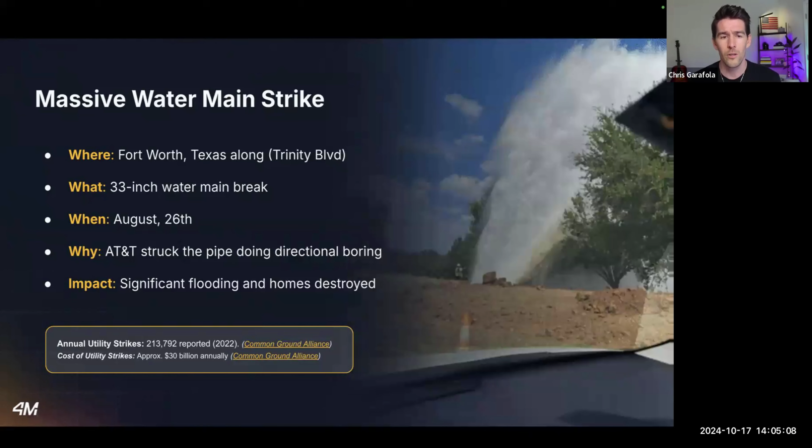Some of you guys might be aware of this one. This happened earlier this year, a massive water main strike in Fort Worth. A 33-inch water main was struck by an AT&T contractor during directional boring, and there was significant damage. I know we always talk about utility strikes on the impact that it has on projects, but as you can see here, there's greater impacts, intangible impacts and costs that these strikes have on our communities.

As you can see in the bottom here, over 200,000 utility strikes a year. This is from the Common Ground Alliance. This was in 2022. I can only imagine this number is expanding because there's more and more stuff going underground every single day. It's only getting more complex under there. And the cost of utility strikes, approximately $30 billion annually. Again, this is probably a soft number here because there's a lot of this impact that you can't even measure or quantify that's happening from utility strikes outside of the effects and impacts that it's having on projects.

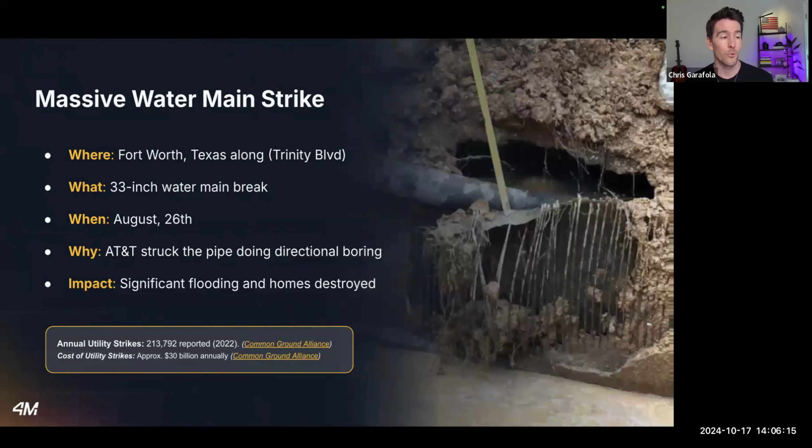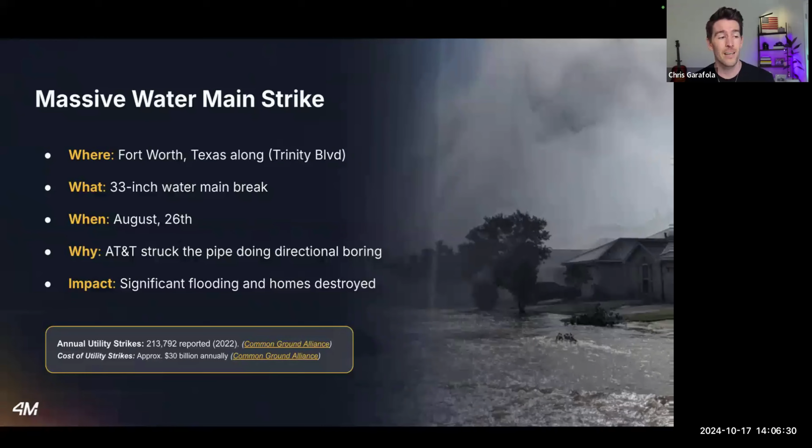In this example specifically, this could have all been avoided if AT&T had faster, earlier access to reliable utility data. They could have redesigned or relocated this utility prior. It also could have been avoided if they were to validate this before digging themselves as well. So it's just another stark reminder of what's at stake here without fast and easy access to reliable utility data.

Another example, this just happened this month. You might have heard of this one as well in Jamaica, Queens. A high pressure gas line was struck and an elementary school had to be evacuated. So again, this is just a common occurrence. These are just two examples. You guys are seeing this in the news every day. And if you're not seeing it in the news, you might be experiencing it yourself in the field. So it's obviously a really, really big problem.

And it begs the question, where does this problem come from? Is it just bad luck, or is there something systematic going on here that we need to dive into? I'd argue that it's not bad luck. So let's start by looking at what the data is telling us.

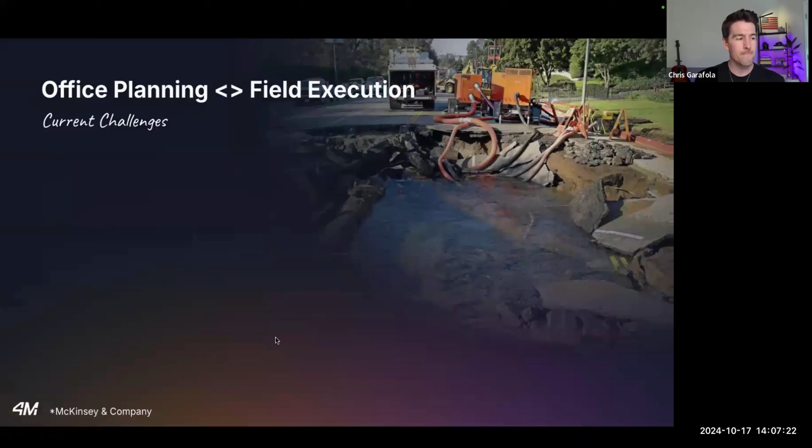So the data tells us there is a main challenge, and one of those challenges is there's a disconnect between office planning and field execution. In other words, there's a gap between the data that we collect, or honestly don't collect, our plans, and the reality that's on the ground. It can feel like we're operating in two different worlds here, and you can see the impact.

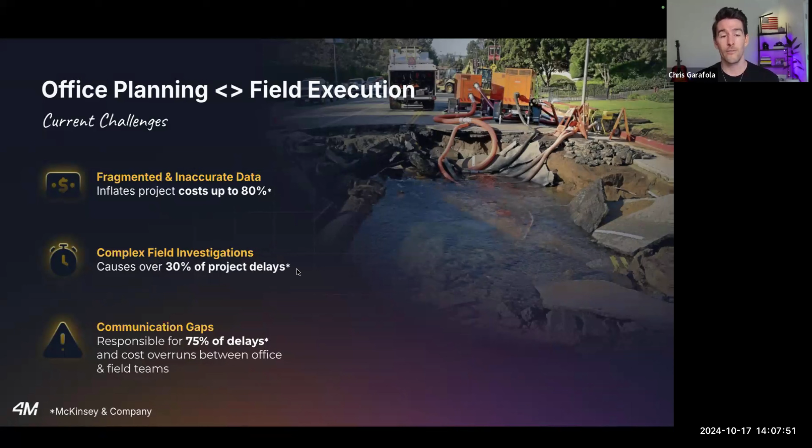So you guys are aware of the challenges. The data is saying one thing. Obviously, you guys are the experts here on the call and that are here during this live session. Stuart, you're the expert here. I'd love to get your take on just the data that's presented here and what you're seeing in terms of some of these traditional challenges. And do you think that we can future-proof America's infrastructure, continuing to do what we have up until this point in terms of planning, designing, and building for our infrastructure projects?

Yeah, I think, thanks, Chris. I think it's pretty evident that we cannot. I think you just look at these facts and figures and the digitization of data, and simply, it comes down to two things: having the data in a consumable location and having accurate data.

And the fact that we still are... I've seen an as-built recently from a project that I was working on that was literally a highlighted plan sheet, and then they took a picture of it. And it's like, how do we get away with that?

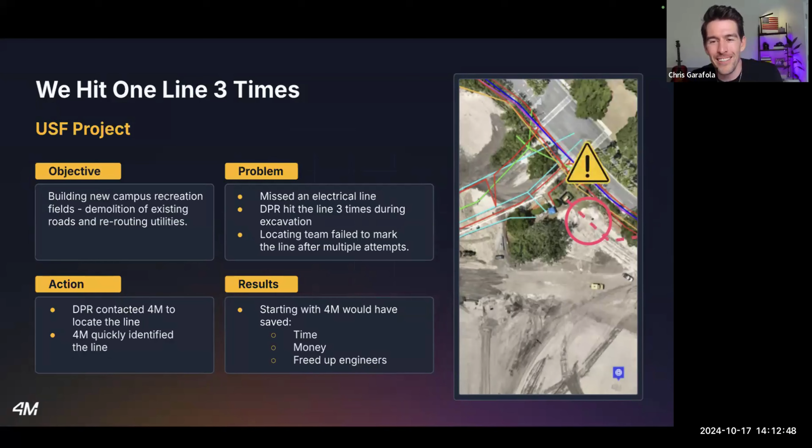So this is an interesting story. We've been talking with you guys at 4M for a little while. One of my colleagues discovered you on the internet and said, hey, it's 4M, maybe we should take a look at them. We looked, and we didn't quite understand what it was, and we had this project in Tampa for the University of South Florida, on private property.

The as-builts they gave us were on some PDFs that we questioned the accuracy of, and obviously they were incomplete. So we sent GPRS out there, and they provided pretty robust information, located what we needed. But where you see that dotted line, there's a small electrical line running from that generator back to the main on the road, and we hit that line three times.

We had GPRS come out three times, but they had trouble locating it. They couldn't locate it. There were a bunch of tree roots there, and I think they just got confused. Our teams literally did the due diligence they needed to. They went with 811, got the information, got the as-builts from the owner, called GPRS out. This was already part of our process, already in place. And then we just kept hitting this line.

It was a small line on private property, but we said, hey 4M, can you throw us a bone here and just take a look at what you see? So Taylor got back to me maybe two days later and said, hey, check this out. He showed me some images, and he actually found some flagging in some Google Earth stuff from a couple years ago.

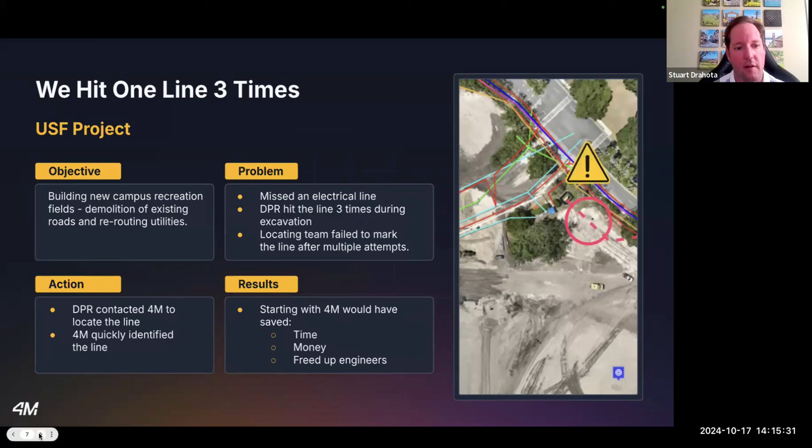So after we went through this, we've kept the conversation up, and we're going to talk about it here in a minute, but we got our first project with 4M going, and we're already seeing the benefits. Awesome.

Great, thank you for that, Stuart. Transitioning now to talk more about the current state of not just subsurface, what's below ground, but also the industry perspective. Everybody attending is within the building space, whether on the engineering or construction side, where building has never stopped, and I don't foresee it stopping in the near future, which is only going to create more complications as we progress into the future - what is beneath the ground, how clean is it, how good is the data we actually have on what's beneath the ground today.

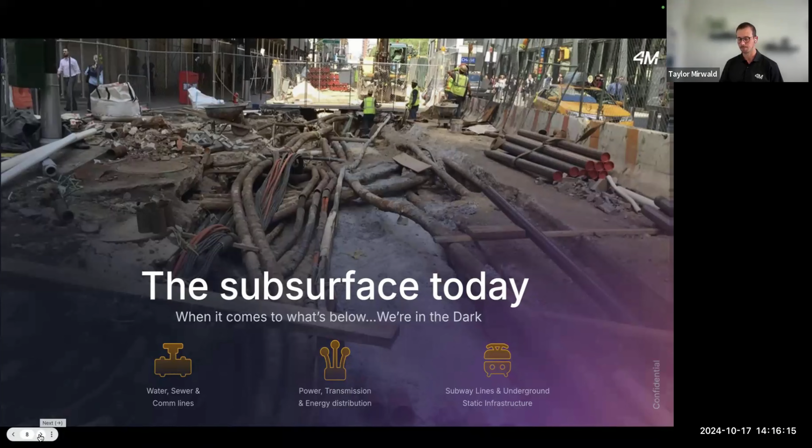Transitioning to talk about the industry and some of the processes used, which are still kind of manual, boots on the ground as the only way of doing things. Yes, survey and all of these types of processes are required, they're essential. But what value does it bring if you can have this information faster and in a much more comprehensible manner, where you're not dealing with the time-intensive process of getting teams out on site and the expense that comes with it - being able to leverage technology to make better informed decisions in a faster manner.

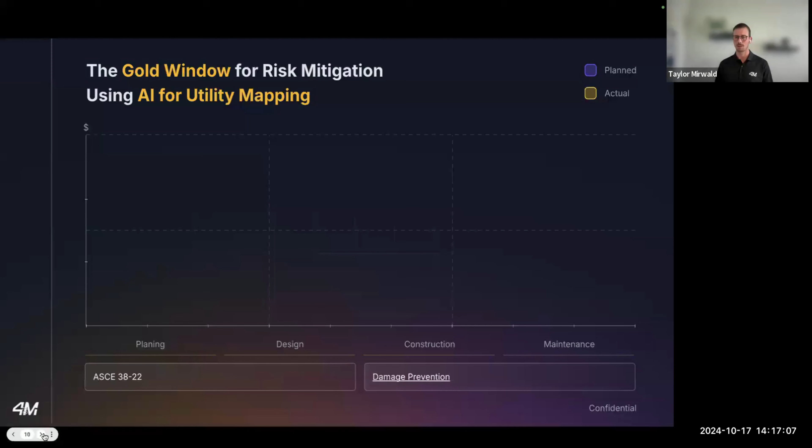Stuart, a question for you - when it comes to the industry as a whole, and being that you've been on the technology side for a bit with DPR, you've started to see that transition in adoption. How would you approach a conversation with other construction executives who maybe haven't taken that step into leveraging things like AI or technology as a whole?

Yeah, I think it's coming, it's inevitable. That's part of the reason I'm where I am in the industry - I see where this is headed. We're at a point now where there's a lot of fear and question about AI, but trust but verify, right? So the advice I'd give companies is we really just have to do our homework and due diligence to make sure we're putting the proper plans in place, eliminating opportunities for mistakes, and doing all we can to specifically make sure we're not hitting underground utilities. Not sure if I answered your question there, Taylor.

Yeah, definitely. It seems like it's more of a mindset shift, really, at the end of the day - taking more proactive approaches, because the reason you use technology is you're getting information faster and in a much easier manner, where the more reactive side is it's too late to be pulling technology in because something had already happened.

Yeah, I mean, think about it - if you invest, say, $10,000 to do a robust survey with 4M and GPRS and get your information straight before you start a project, and you don't hit a utility, right? Versus, hey, you go hit an electrical line to a NICU - we're talking about babies, you know, not being okay, right? It gets really interesting when you have a mistake, and you're talking schedule delays and cost of repair, and really you're talking about people's lives.

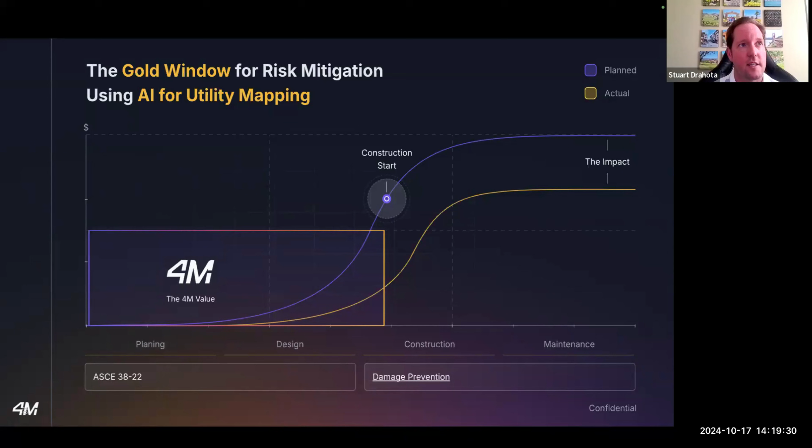So, you know, that cost isn't even quantifiable. How much is your schedule worth? How much is rework?

Exactly, and you teed that up perfectly. Talking about the when and where in terms of where 4M comes into play, it's where we fit in the process—being as early on in that lifecycle as possible, whether for your engineering teams with planning and design, or for construction contractors in that first stage where you don't have boots on the ground yet.

And what this is really painting the picture on is your different budget curves of planned versus actual, where having visibility into any potential unknowns as early on as possible within that project's lifecycle matters.

What does that do for setting the teams up for when they get on site? Are we eliminating potential relocates? Are we mitigating delays, where all of this has the highest cost impact at that stage of the lifecycle? Uncovering this information much earlier sets up a better project kickoff, but also more visibility into the potential areas of risk.

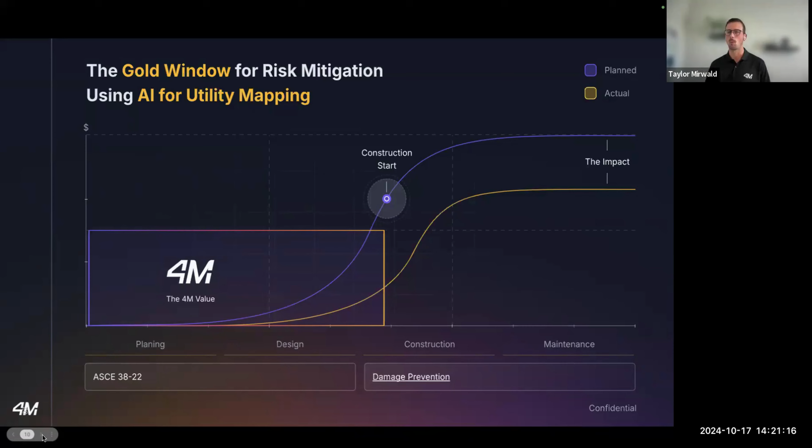Like you talked about, Stuart, on that USF project—if we had reversed the way we went about it, and you had come to us first and provided our imagery to GPRS, they could have optimized that field investigation better, uncovering that way earlier on than when push came to shove of actually striking the line itself. So really this reinforces why the 4M is used so early on, versus being reactive—if we hit something, what else may we be missing, kind of thing.

Absolutely. Now, so that was the when and the where. Now the why—and I'll give you the how as well later.

So the why really goes back to the topic I mentioned earlier of manual processes, frequent trips out on site, where all of this becomes redundant, it's painful, and there's a dollar amount to everything. Everybody's working on an hourly wage.

So if we have a way to optimize some of these processes so your teams are working more efficiently, what does that do for the project? Does it accelerate the planning and overall kickoff, liberating engineers and PMs so they can prioritize and focus on other areas related to the project, aside from just utility infrastructure within that specific area? Or even more so, mitigating risk and uncovering those unknowns as early as possible to set the project up for as much success as we can early on.

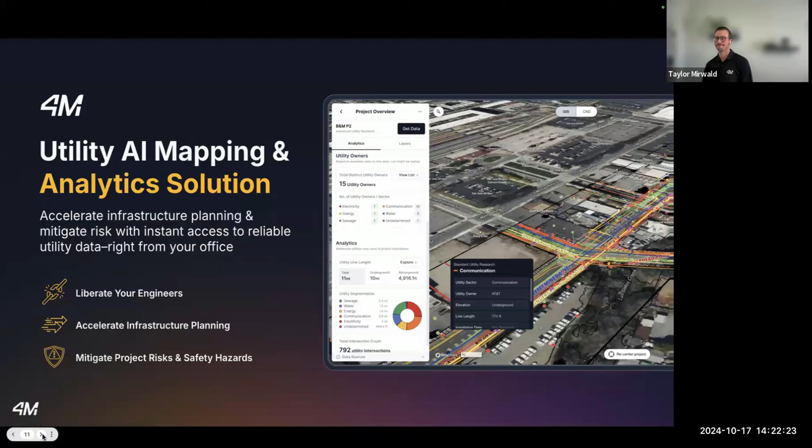Cool, now let's talk about the how. Obviously we're going to show you guys what things look like here, but it's really important to emphasize how we're going about doing this—how did we come about as a business? I think the biggest thing to emphasize is we're a tech company where we leverage a lot of different types of software.

Buzzwords like artificial intelligence, object detection, where we've trained our own algorithms on publicly available data, which allows us to create our own proprietary maps and synthesize this information down from millions and millions of different types of records.

So some of you may be thinking, okay, what kind of records are we speaking of? What are these sources? Some sources can be anywhere from a public database like Dodge Data or ConstructConnect, where RFPs are published, any kind of bidding or estimating documents, or it may be something like GIS servers or GIS layers—anything available on that front.

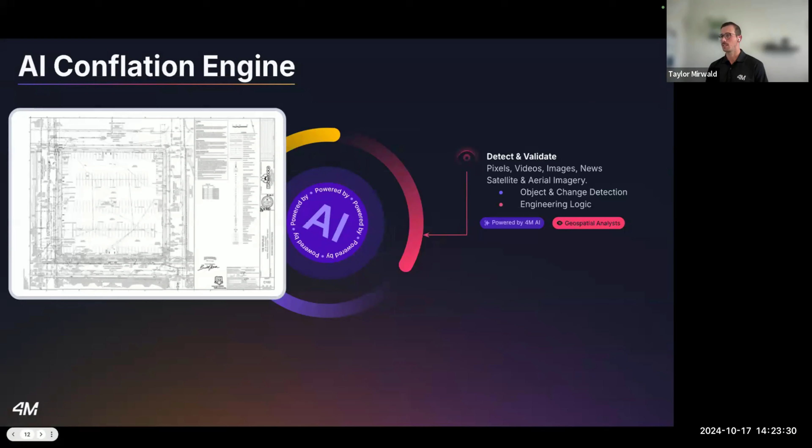Once we've collected this information and synthesized it down, there's a process of detection and validation that goes into play here. This is a really important piece to emphasize, because like Chris was talking about, like Stuart was mentioning, inaccuracies in records that you're getting as field teams and engineering firms is a very common occurrence. So what good would it be if we're just providing you with the same records you're already receiving from your owners?

Kind of that garbage in, garbage out, where if we have the ability to actually detect and validate that specific line work and information, we know we're setting you up for more success and more confidence on that specific locate of the facility.

So how we're going about doing that is using things like object and change detection to actually use imagery to identify manholes, or gas marking, 811 markings through a specific area of that project from 20 years ago, because we can use 70 years of historical imagery. So whether it be aerial imagery or Nexar car cameras, to identify any kind of evidence that triangulates to that line work actually being within that specific location. So really honing in on the confidence piece of what we're delivering.

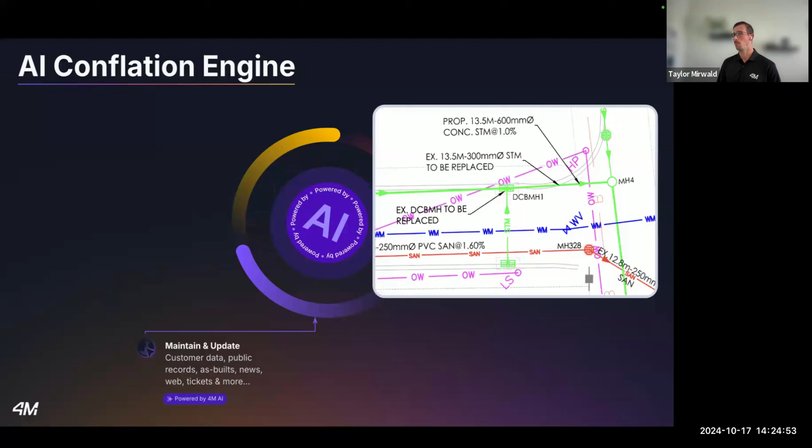And then last but not least, it's the maintaining and updating, always keeping it up to date, because we're pre-mapping states, releasing one every month, month and a half, as well as you can order data on demand. So keeping everything up to date as often as possible, that way you're working off the most up-to-date information as well.

Cool. Now transitioning here, Stuart, I'm going to put you on the hot seat for a sec. Obviously within your role on the innovation and field technology side, your role is to provide them with the tools to build safer, but also make more informed decisions based on the project KPIs. How would you say you've seen that shift over the last years? Is it that you've seen a lot of pushback from teams, or is it that they need a taste of it to be able to go all in? What would you say on that front?

I think it's been quite a bit of a progression. A lot of it is based around the adoption of the model and data and how we connect the field and the office, the digital and the real worlds. For us, it started with the robotic total station and taking CAD files efficiently into the field and laying out from them. And then from there, we started layering in laser scanning, drone imagery, orthomosaic maps, 360 images. That's really helped us connect the two together and made people realize that the model can be real.

Is it real all the time? Is a design model exactly what we're building at the end of the day? No. But it's getting closer and closer every day. And so, connecting the field, we have a process of laying out our work from the model and then checking it against the model with our tools like our total stations and our laser scanners. So that's how we've really brought the model to the field and back again.

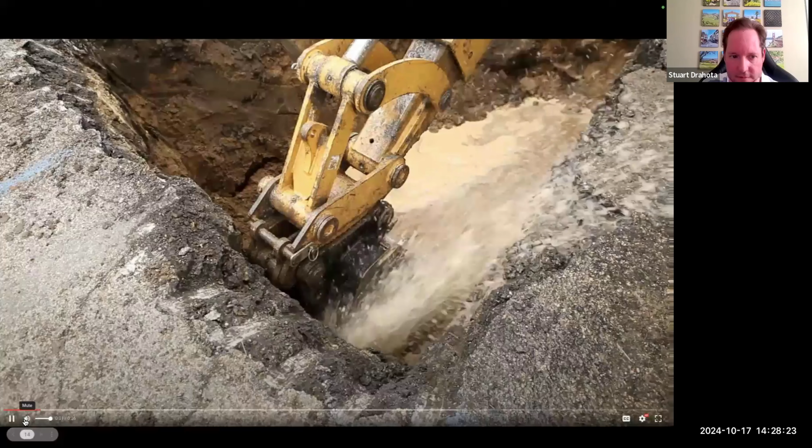All right, how many people have seen this happen? This is too many times for me. But yeah, we're saying this is every project's worst nightmare, right? You start digging, maybe you should have soft dug and you didn't, and you hit a water main, and now what do you got to do? You're shut down the road, you got to get the water team out, you got to repair it. It's a mess.

So just some quick facts and figures: every year in the US, 2,000 injuries due to underground utility strikes, 400 deaths. We're talking 30 billion in societal impact. So top to bottom, what does that mean? Most of these strikes, three-quarters of them, are really attributed to people not having good as-builts and not having a good process to locate the data. So pretty alarming figures if you think about it. A lot of opportunity for improvement. Let's say that.

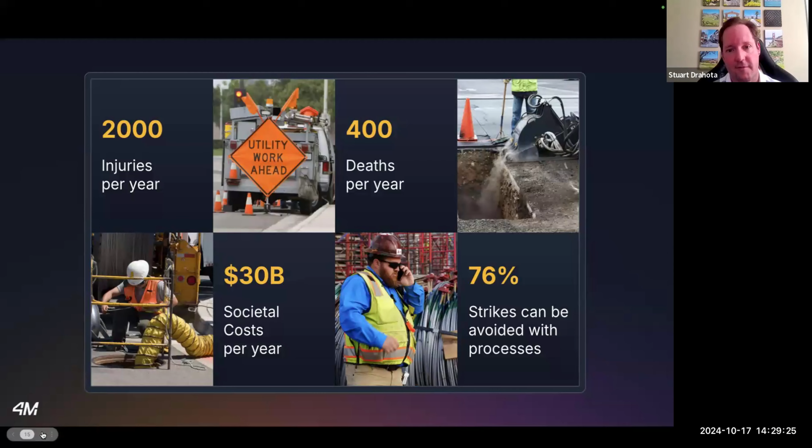Now, talking more specifically, Stuart, this is one of the projects you had just alluded to, the first one we kind of dipped our toe in the water with, the John Hopkins project.

This is kind of a screenshot of what our deliverables look like. This is a GIS layer where you have your vector line work, and you can see a handful of on-surface objects called out, your poles, your manholes.

On the left side, you have an analytics dashboard section you can use for a couple different things, whether it be slicing and dicing the line work, maybe you just want to see communications through your project area, or maybe you just want to see FPL's line work going through your specific area. You have the freedom and capability to slice and dice it as you see fit.

In addition, like I talked about this line work being vector lines, when actually clicking on the line work itself, you'll have that metadata from utility owners, sectors, elevation, material types, as well as on the on-surface object side of everything.

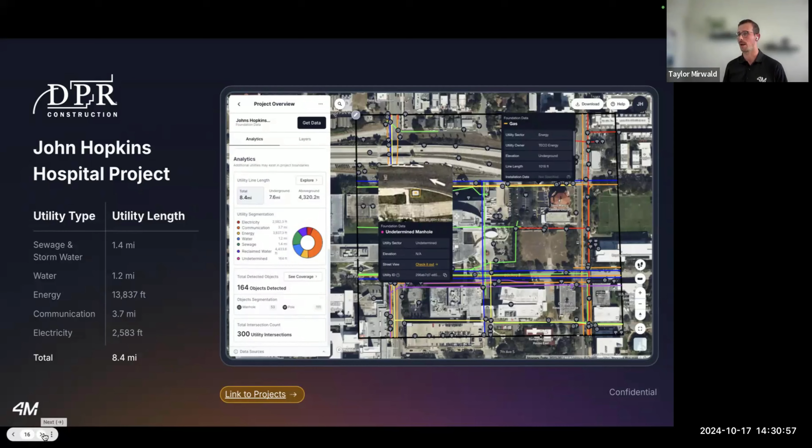A new update we just released where you can actually see the direct image of it. Because we have Street View embedded into the platform, you can directly hop right into that specific area and see that manhole or that pole or whatever object we had detected.

Thank you, Chris. Now speaking on the partnership and how we go about our deliverables - funny enough, it was on Tuesday, we sat down with Stuart and some of the DPR team. This is a typical process of how we deliver our deliverables and maps, walking through the specific map with actual evidence and imagery.

To highlight the areas where maybe we had moved a line because we saw something on surface, or maybe we added an additional line. So really honing in on, hey, this is what we put together, this is everything we found within this specific project area.

Stay here, Chris. Throwing a couple questions to you, Stuart. So obviously getting to this level with 4M requires 14 business days on the high side to turn this around for you. We had built this deliverable together in 12 days. Thinking about now in tangent, what the process would be like originally to get to this - do you mind elaborating a bit or shedding light on this side by side and how they compare from a process perspective?

Yeah, absolutely. Just thinking through what this project is, we're not going to start for probably another month or two with construction. So first of all, having this data now is invaluable. For us to collect this data, what we probably would have done was call up 811.

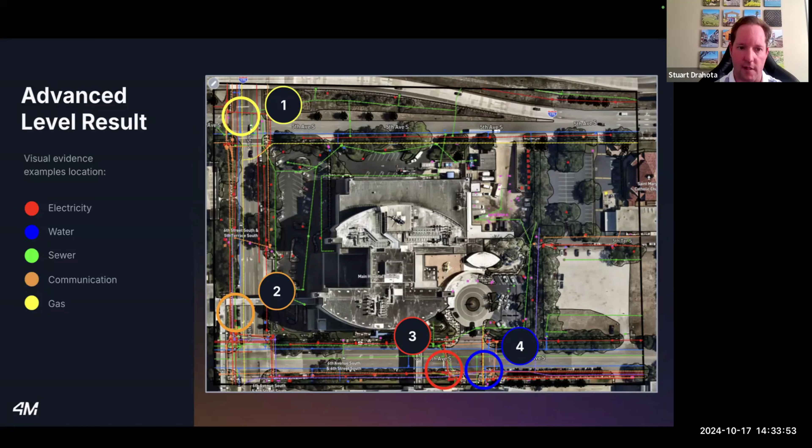And just talking through the quality of this deliverable, the advanced versus the basic versus the as-builts that we had - it's really interesting to see how all the lines do shift a little bit. I mean, there was a gas line - Chris, go to the next one.

Yeah, so the gas line is in a totally different spot. And gas lines, water lines, electrical - those are as critical as it gets, right? So us being able to have a little more confidence of where that is.

We're not done there. We're going to send GPRS out and have them focus on certain areas, specifically on that left side of the page and that parking lot where we're doing the expansion. There's still some investigation to do, but personally I feel a lot better already just seeing that information, because we're months out.

We can start making some decisions, start doing some planning, thinking with our superintendents about what are we going to have to shut down, what are the systems that are going to be affected, what's that plan look like now.

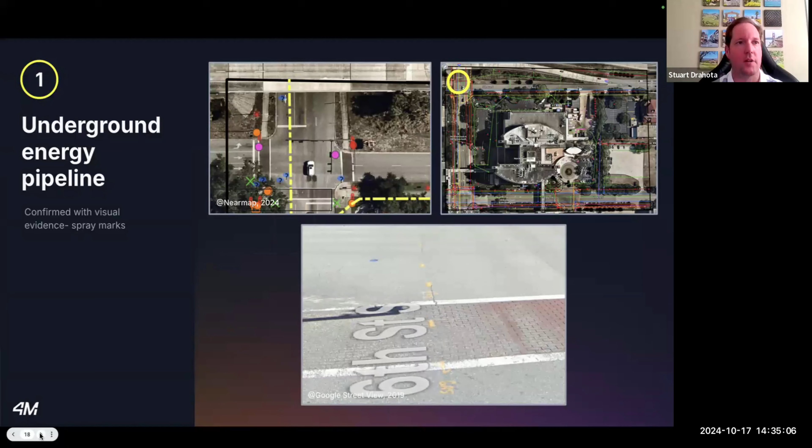So like you were saying earlier about being reactive, we're being active right now. And when you're active, you're spending money up front, but you're saving it on the back end. I think that's the most important thing.

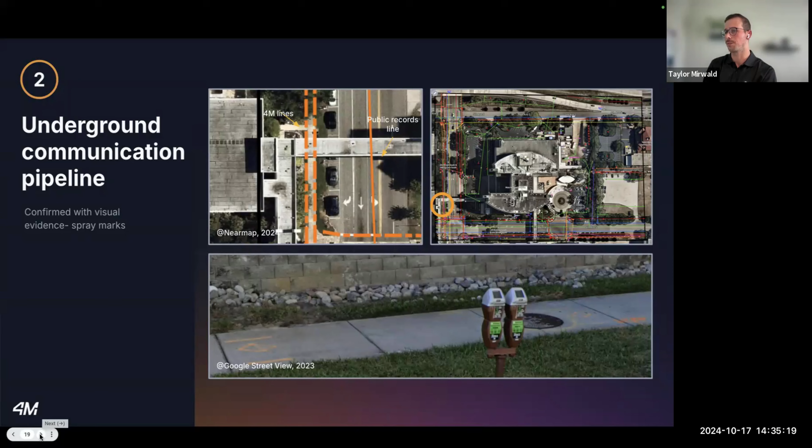And like you see in a lot of these images, we're providing you with the screenshots where you can see at the bottom the date stamp. You have Google Street View 2023, and I think the next one is a 2013 image. So really leveraging that historical analysis to hone more in on the confidence side of things.

And kind of wrapping a bow on that, Stuart, how does this then change your approach and the project kickoff piece of this? Having this as the first step, how does that change versus the old approach, I guess?

Well, it really gets back - so when we were talking about that graph of the construction life cycle you showed, we call it getting left of the line, and right of the line is construction. So construction's the line, and left of the line is the planning part. For my group, honestly, this is a huge opportunity to go ahead and get data and validate it.

I'm going to share a little bit later about how we get this into Drone Deploy, but it's just giving us the ability to consume this a lot quicker. And selfishly for my group, it gets us on site sooner, gets us contributing, gets us engaged with the project team to start digesting digital deliverables, so that we can contribute more to the project.

So if I had it my way, we'd be doing this on every DPR job. It's that necessary, and it's really saving us that much time and effort for just knowing what's under our feet. That's the bottom line. Yeah, I think that's the most important part about it.

And I think the last area I may have you shed some light on before moving on is, obviously you're within the tech space. From an innovation side of things, you have your hands on a lot of different software, gone through a lot of different implementations, where most software implementations can take, if you're lucky, a month, to on the high side, six months until teams are actually using it. Do you mind shedding light into the experience of logging into 4M and ordering data, and how the tool is used?

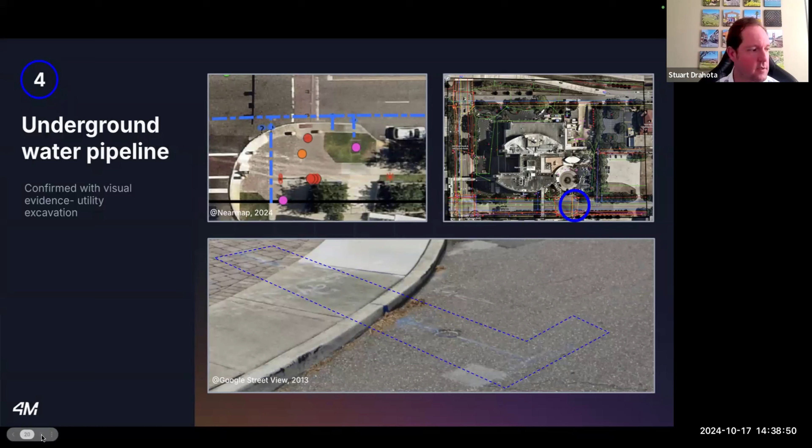I think this is the perfect transition here. We talked about the 4M side of things, receiving our data as early as possible within the lifecycle, and now comes the active construction, constant as-builting, and how the team is tracking that. From here, I'll hand this off to Andrew and Stuart to speak more on the Drone Deploy side.

Thanks a lot, Taylor, super good setting that up. On the left side, you have 4M helping with the early planning and investigation side of the house, and tying this all together, you can see how these systems begin to converge and add value on top of one another. At Drone Deploy, what we really do is process that data from the current job site, as Stuart was mentioning, once execution starts happening in the field. Customers use that data to monitor and maintain the site once construction gets started - starting in the office doing early planning and research, validating it from there using GPRS and all those things, then executing that strategy for managing and monitoring throughout the process.

The key behind that is consistent capture, and Stuart and his team have done a really good job establishing that - that's a really important part of this as well. But you can do this throughout the project lifecycle, which is really key.

We're obviously talking about early days here, but this is something where you start off with the green field. Now you're laying out site utilities, putting the structure up, closing everything out and handing it off to the owner. All those changes you need to track along the way, you can use Drone Deploy to reliably get all those up-to-date conditions.

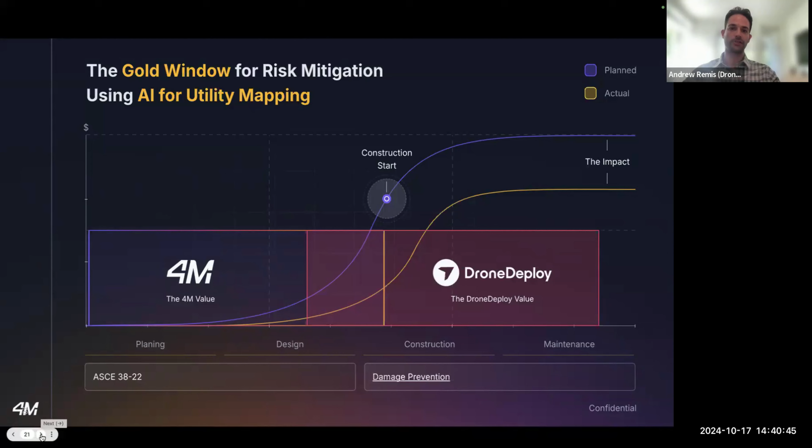Just following this process, what teams are really able to do is document exactly what's in the ground before everything gets closed up, using the intelligence gathered earlier. Then 5 months later, a week later, whenever that is, whenever a question comes up, you're not wasting time going back and forth guessing or disputing where something is. It's just there. Everyone can see it, everyone can look at it. It's always up to date and useful, as long as you're capturing consistently.

As you can probably tell, the analog way that Stuart was overviewing earlier, there's just no way it can keep up with this level of activity going on the site. It's outdated by the time anyone can even use it, right? So just looking at these examples in GIF form, where now you're actually going out and capturing this.

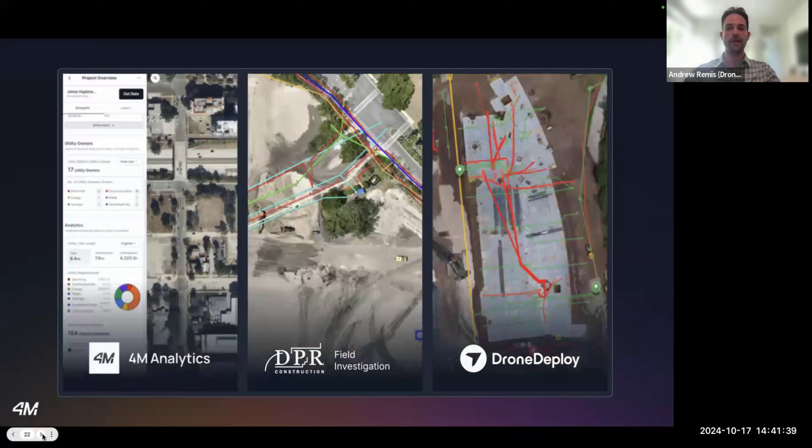Just a few visuals of 4M in the office. Again, you have DPR doing their homework, validating everything in the field, getting coordinates aligned, and then capturing as often as possible to eventually be consumed as as-built in DroneDeploy, which Stuart's going to go over in just a few minutes. Not to sound like a broken record, but the theme here is being proactive versus reactive, not just waiting for something to happen.

Starting as early as possible to get that data, having a plan for what that regular capture is going to be, knowing who's going to be your champions actually enforcing this, and knowing what you want to capture - so that's done right. Just by following that, Stuart and his team have done a really spectacular job of setting an example on that front.

I'm going to try to move quickly here, a couple quick minutes on DroneDeploy. We are the leading reality capture platform, which at this point means way more than just drones. We've seen the industry evolve a lot over my 6.5 years here - now it's drones, 360 cameras, LiDAR scans as mentioned earlier, even a fixed camera if you want a live feed to view the site. Our goal and our charter is to make it easy for our customers to capture, process real-time site data, analyze it quickly, or share it out to anyone who needs it.

Just to give you a sense of what you're looking at here, you have work happening every day. You got Stuart and his team capturing the site with drones. They're walking it with 360 cameras. They're uploading it to our software, and very quickly they're getting very accurate orthomosaic maps, 3D models that they can analyze and annotate, all the complex changes that Stuart and his group are trying to manage around the site. This does a really good job of sharing and updating everyone and connecting teams on what's happening, no matter where they are, both at that macro level and on a micro level.

So I think Stuart's going to walk through how this actually works. Yeah, so digital dig board, a new concept we got rolling, and I'm just going to set the stage with what we had and kind of where we've gone with this. So you can go ahead and move to the next slide, Chris.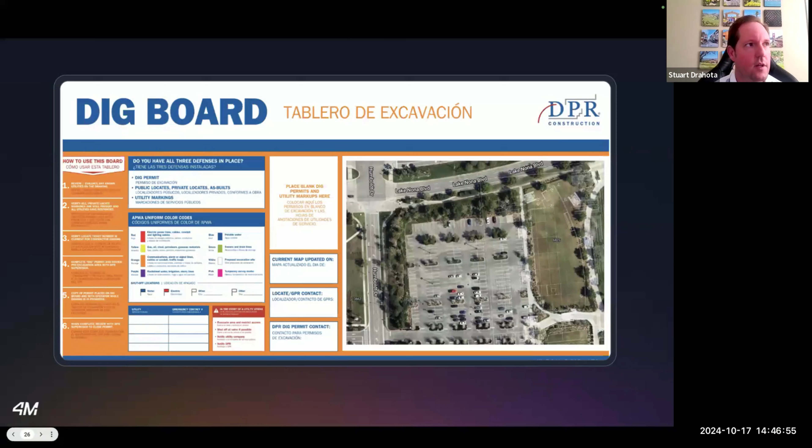So what did we do? We digitized it. So we're going to show a video now setting the stage, showing how we got to our digital dig board. Three goals: go digital, continue to connect the field and office a little more, and then make sure that our project team members are accountable and using the dig board properly to ensure we don't have strikes.

So we're just going to walk through this little video here. This is a demo on site. We have a touchscreen monitor, you can buy it on Amazon for $900. It's literally live on DroneDeploy, and you can go day to day, week to week.

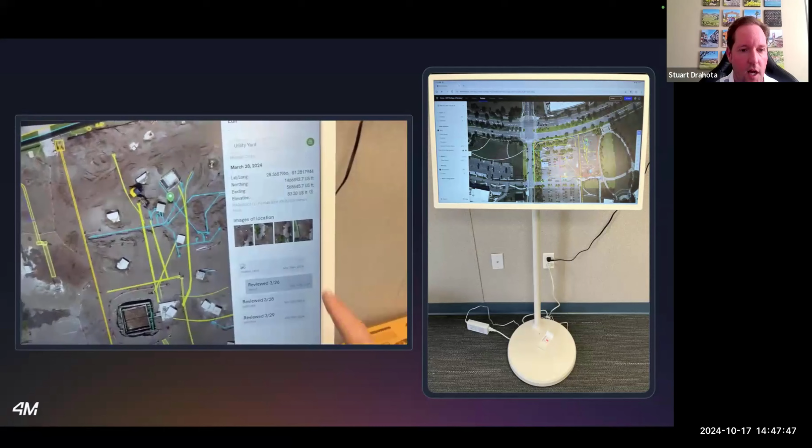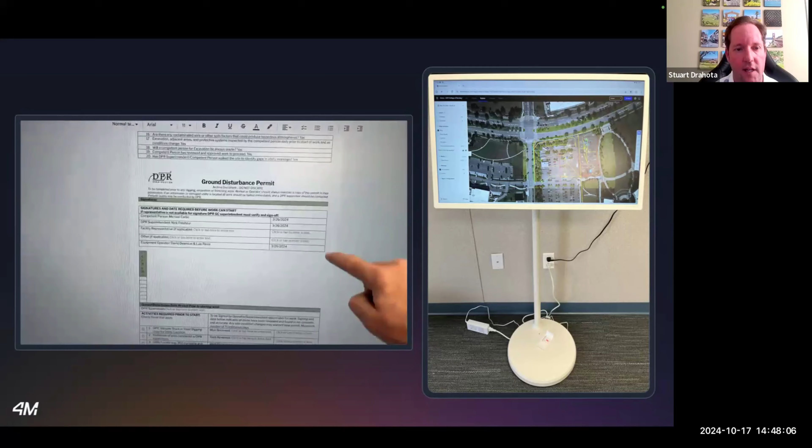But the real value here is two things. We're using it to track our dig permitting process. We upload the dig permit and a DPR representative signs off on it. We congregate around this in the morning, talk through what's going to happen during the day. Instead of this just being on a board out in the field, it's digital, it's everywhere - on the phone, on the tablet, on the web platform, here on the touch screen. And it's easily accessible to anyone. You can walk out in the field, click on your information, and realize what it is.

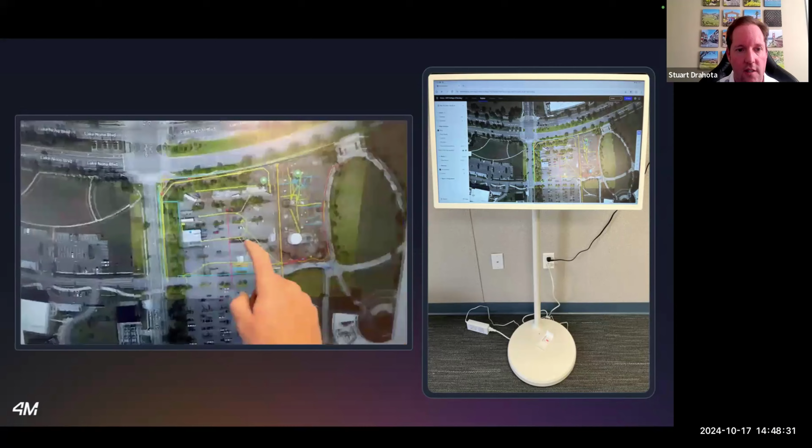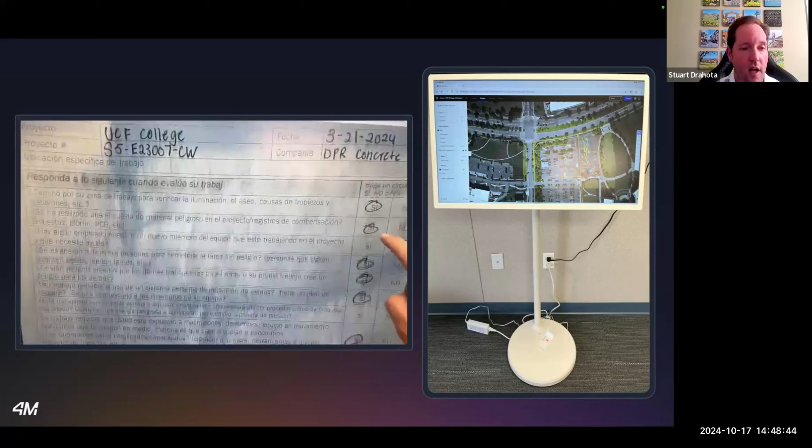And how did we get here? So all these lines, this is GPRS data, as well as us as-builting. We flew the drone every single day during underground construction. It's a simple process - we're using the annotation tool, maybe not what it's supposed to be used for, but hey, we found another use for it. We're literally drawing over the top of these utilities to ensure we have them captured. It takes 5 minutes, literally. So we're going from the field to the office and back to the field in less than 24 hours.

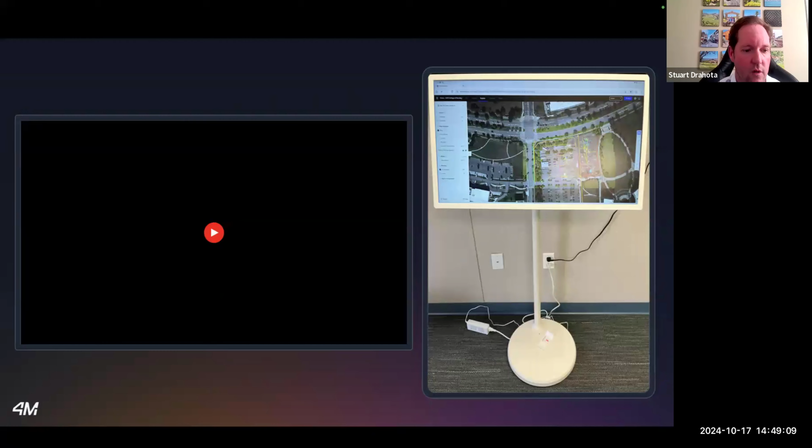Pretty efficient process. Is it 100% accurate? No, but we have validated it with total station data, and we're within an inch or two. So for us, when we have to have a 5-foot clearance around anything in soft dig, it's great. It works just perfectly. Another thing that we've done is we've continued to democratize the data on site.

So we have QR codes posted up in different spots. We're able to hit play, Chris. Literally able to go out there, scan the QR codes. Anybody on site - project manager, superintendent, craft guys - can go out there.

So I'm just kind of walking around the site. You can go out there, scan the QR code, and you have access to the web version of the platform. If you've got the app installed, it pulls it right up. But even just using the web platform, it comes right up.

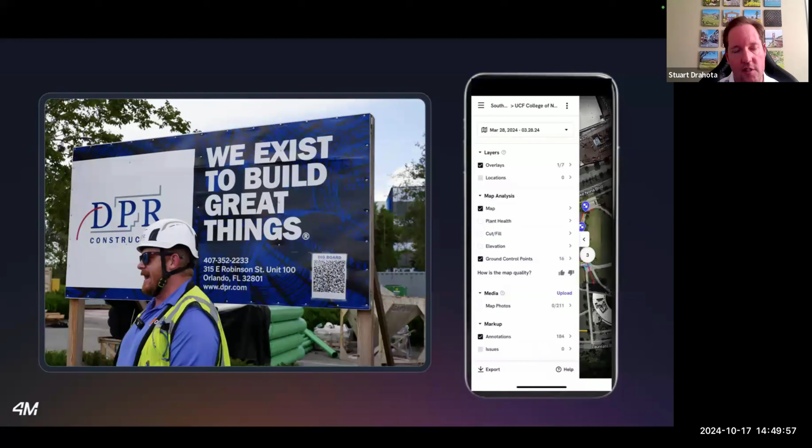And here we go again, using something maybe it wasn't designed for, but we were like, hey, we had this shift of focus. This is a big thing for us - of why won't this work to how will this work? And when we had that shift of focus, that's when we really started putting it all together.

So you can see the blue dot, that's me, that's accurate to within maybe a foot or so. And I'm literally walking around the job site with the phone in my hand, and just, hey, what's underneath my feet? That's what we've literally provided - to anybody that's on site, they can pull open the app and literally understand what's under their feet.

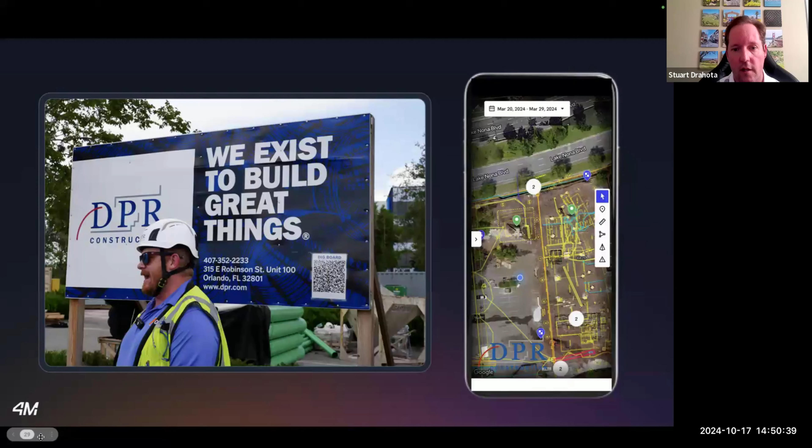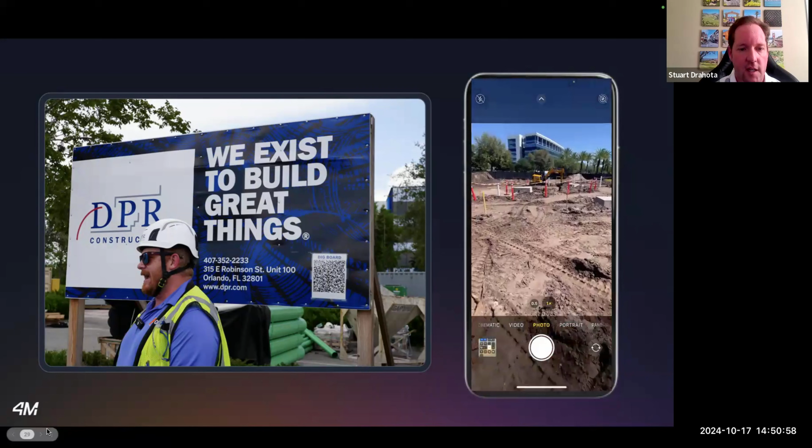So it's really just increased the field to office connection, and then just the safety factor and the comfortability of our trades, our guys in the field, the men and women doing all the hard, dangerous work. They're able to have some form of security to understand, hey, what's under our feet. Should I ask my supervisor if I should be digging here? The answer is yes, right? We should be soft digging, and we should do it with supervision, and we should make sure we're being safe. So, yeah, pretty interesting tool.

So we just kind of started messing with this process here. It's very simple to get the 4M data into DroneDeploy. With the advanced layer, you can literally download the CAD file, bring it into Civil 3D. I just had to do a little bit of cleanup with some of the line types and just getting rid of some of the background information.

But then as long as you export in the correct EPSG code that matches what's in DroneDeploy, you can literally go into DroneDeploy, upload it as a DXF, and it comes right into place. So seamless process. You can do the same for GPRS data. It's just been awesome working with DroneDeploy - they've really accepted a lot more file types recently, and they're continuing to do that. It's simple, it's easy. And just along those lines, a quick surprise for you on the webinar, Stuart.

Pretty soon, by the end of the year, you'll be able to put those 2D DXFs right in there and skip that fourth step entirely. Just trying to make you even more awesome, more evolved in the process, going straight into 2D.

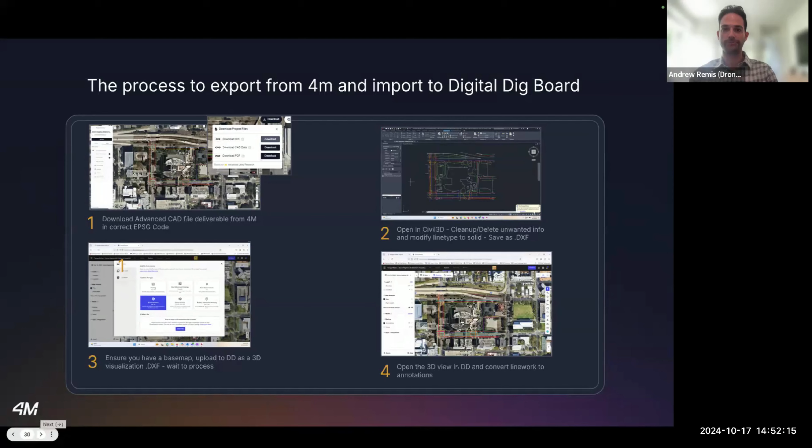Cool, I'm excited. So we're just going to briefly talk through the three different ways that we're as-builting right now with DroneDeploy on our projects. The first one is literally just taking the annotation tool and drawing over the top of the exposed pipes. This is simply an efficient way to get this data from the field to the office and back to the field again.

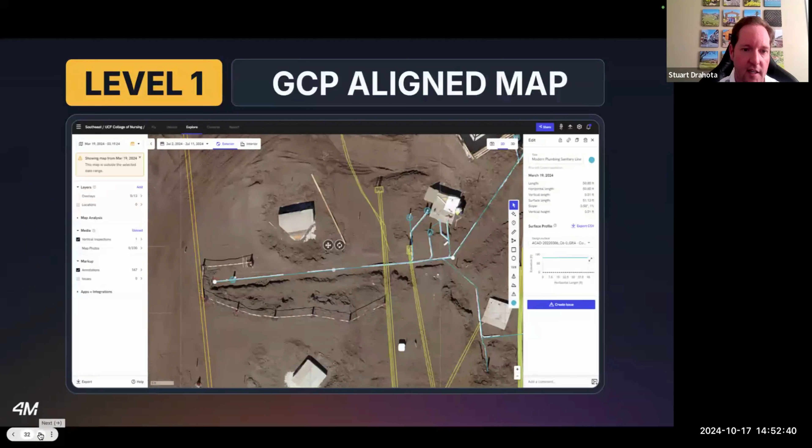We validated it—if you go to the next slide, this is actually total station data from our surveyor. What was really cool was the first time we brought this in, the drone data and this data lined up perfectly. That was a huge win for us, because we were like, okay, we can do this—we can use drone imagery to as-built. It kind of was a game changer for us, to be honest.

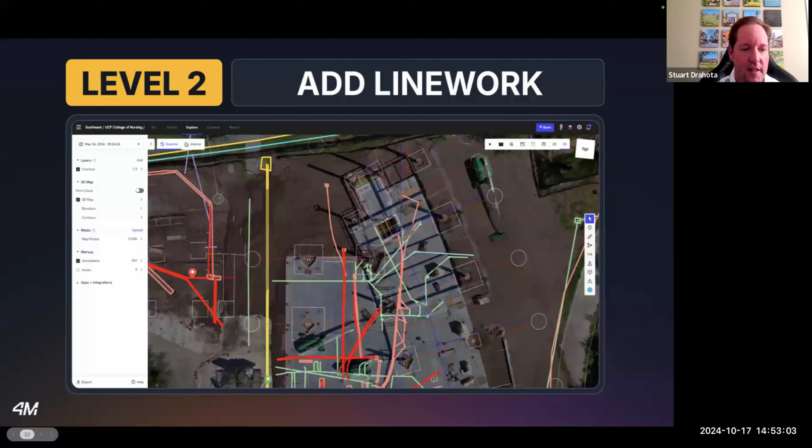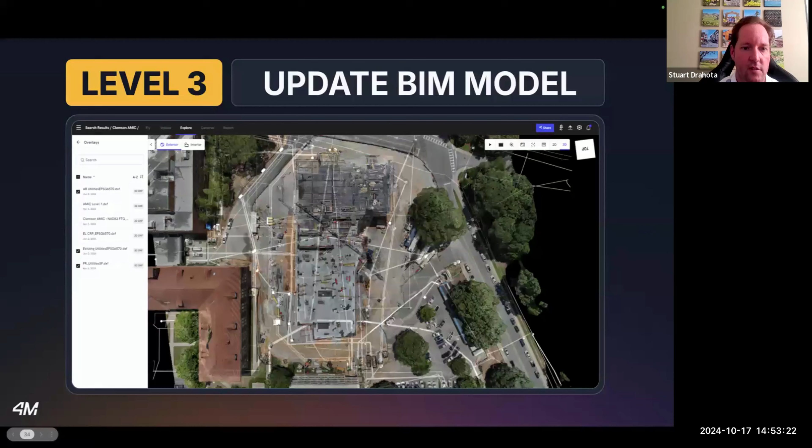The next level is DroneDeploy will now take IFCs and DXFs, like I said before. So we've been able to export that RTS and that drone data, take it into Civil 3D, do some basic pipe modeling, and then bring that back into DroneDeploy. Pretty cool stuff. So how do we make this work?

We've simplified a process from sending the data overseas to get modeled and come back to do these overlays, going from maybe a team of four or five people to a team of two.

So Andrew mentioned the champion before—that's Barath, he's my go-to guy out there. He's our Part 107 pilot, and he's in charge of all our VDC coordination. Barath does a great job of wearing multiple hats on the job site. He manages the platform, all the permissions, keeps the annotations updated, makes sure the maps align properly. He's doing flights probably twice a week now. But he's the champ—he's really the guy that's making it all happen.

And then Nick's our enforcer. Nick's my partner in crime, we do a lot of presentations together. He's the boots on the ground superintendent out there, making sure everybody's using the platform, making sure we're getting our dig permits in there, getting them signed off, and just keeping everybody accountable. That's where that project accountability comes in.

So these are kind of the keys to success, right? You got to get the whole team to buy in—it's not just the GC team, it's the trade partners, it's anybody that comes on site. It's a part of our orientation—you learn about the dig board, you get your DroneDeploy login, they may even take you over to the touchscreen and show you what it is.

We committed to the process. We've had hiccups, we've had a strike on that job, but it can actually be attributed to not following our dig permit process. So the process works.

Keep going, just keep committing to what you're doing, build in those redundancies. Having some quality checks every once in a while, getting a total station or GPS out there is super important. You can capture with an RTK drone and or GCPs—either will work, but you got to make sure that data, those drone maps from day to day, are tight. So that's why we're saying capture with control, and just go fly every day if you can. Just go do it—it'll pay off, I promise.